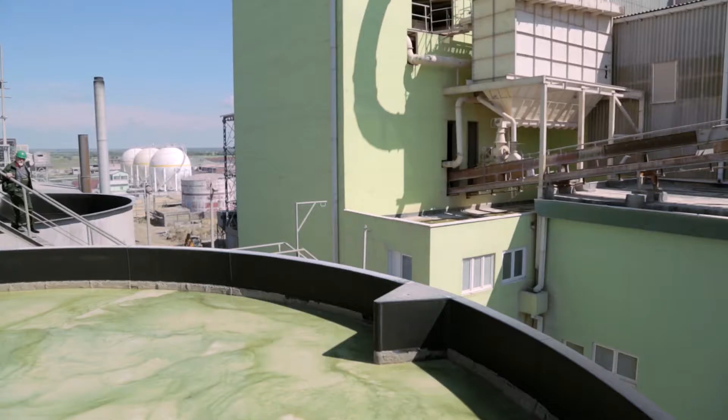The Elixir Group business system is based on a vision of advanced and profitable agriculture. With its 6 member companies and 1,500 employees, the Elixir Group is a regional leader in the chemical industry, in the production of phosphoric acid, complex mineral fertilizers, and other areas of agribusiness.

All the companies making up the Elixir Group system are connected strategically, administratively, and logistically. They are located on the banks of the Danube and Sava rivers, which are regional traffic arteries. The production capacities of the Elixir Group's chemical division are technically integrated: phosphoric acid, refinement of phosphoric acid, mineral NPK fertilizers, and aluminium trifluoride.

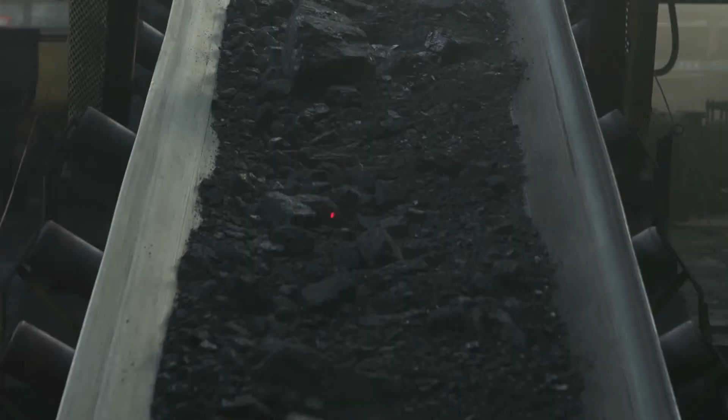At present, production processes in the chemical division use fossil fuels, which account for between 5 and 12% of the cost price of finished products.

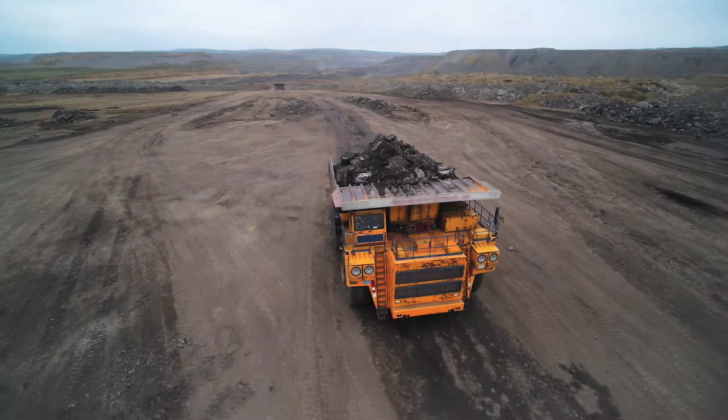The group's most important strategic goals are aimed at increasing energy efficiency in the chemical division and completely replacing fossil fuels with alternative energy from renewable sources. In order to achieve these goals, in line with the corporate strategy of sustainable development for 2020 to 2025, the Elixir Group is establishing a new subsidiary, Elixir Energy.

The principal function of Elixir Energy is successful synergy with the chemical division by implementing the waste-to-energy concept and the circular economy model.

Waste-to-energy means the production of energy by the incineration of waste or the processing of waste into sources of energy. The integrated approach to waste management includes a collection network developed collaboratively with all operators, generators, and owners of waste in Serbia, temporary storage and physical treatment of waste in eco-lager facilities, reuse of recyclable chemicals in the chemical industry, and plants for the recycling of waste as an energy source.

In the Šabac industrial zone, adjacent to the Elixir Zorka complex, is an eco-lager consisting of several installations: multi-purpose covered warehouses for hazardous waste, a reservoir station for waste oils, emulsions, and oily water, open warehouses for non-hazardous waste, mechanical treatment of non-hazardous waste, and preparation of hazardous packaging waste for storage and transport.

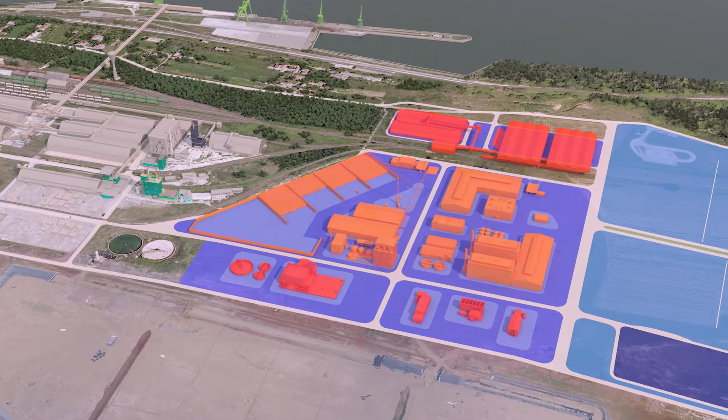The most important features of Elixir Energy are the planned waste-to-energy plants for pyrolysis and incineration of waste. Both plants are fully automated, with integrated systems for safe operation and state-of-the-art measures for environmental protection, in line with the latest BAT demands and EU emission limits.

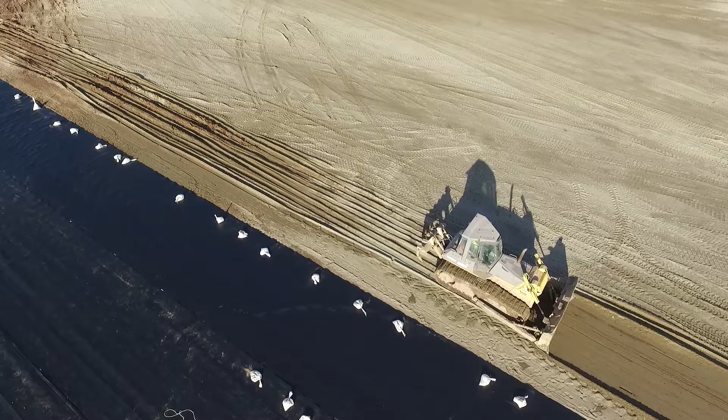Plant residues will be disposed of as non-hazardous waste or stabilized inert solids within the planned ecological island. The waste tire pyrolysis plant uses a thermochemical process to recycle and decompose organic matter. This produces liquid and solid fuels, pyrolysis oil, gas, and coke. The plant also recovers about 10% of metal wire, which is traded as a secondary raw material.

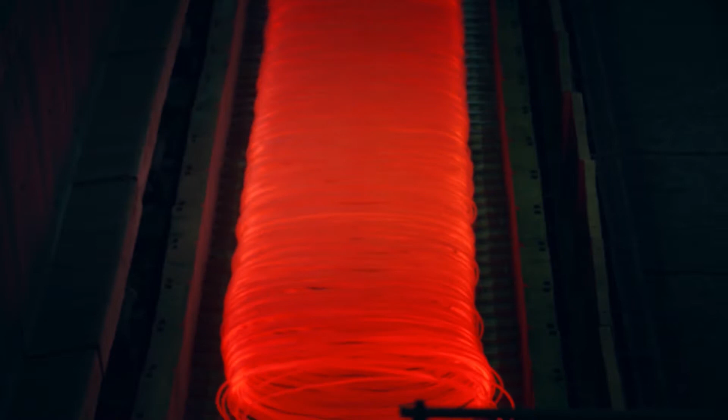The planned capacity of the plant is 30,000 tons of waste tires annually, with the option of including up to 20% of plastic waste. The products obtained from pyrolysis are intended for on-site energy use: 10,000 tons of refined pyrolysis oil, 10,000 tons of coke, and 6 tons per hour of steam.

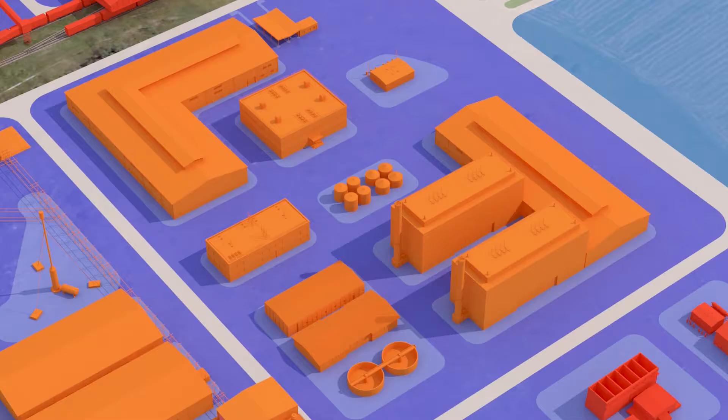Incineration, the heat treatment of industrial and non-recyclable waste, is aimed at using thermal energy and steam for the needs of chemical production processes. It's expected that 35 tons per hour of steam will be produced in the first phase.

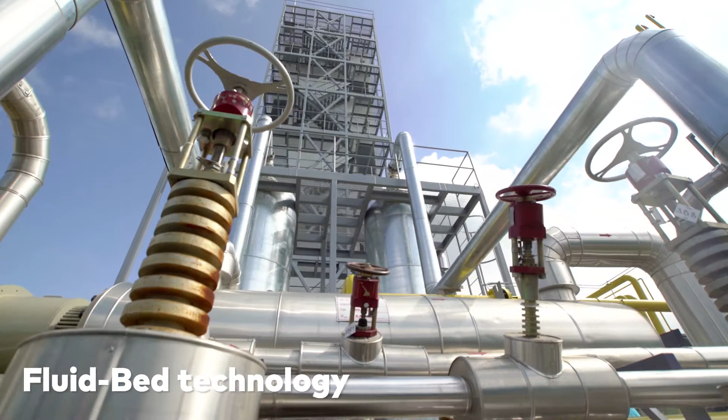Stationary fluid bed technology has been selected as the most appropriate for the kind of waste predominantly generated in Serbia. This technology is versatile, enabling a wide range of solid, paste and liquid waste to be incinerated.

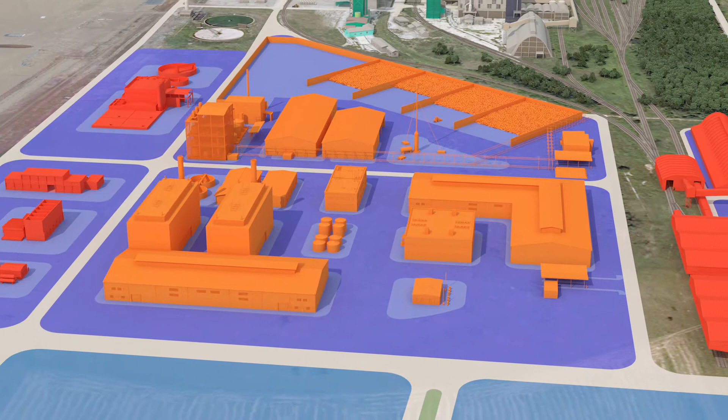The incineration block has a capacity of between 30,000 and 80,000 tonnes of waste per year, depending on the calorific value of the input. 2 incineration blocks will be constructed in phases with a total capacity of 2 by 28 megawatts, in parallel with the development of the industrial chemical park.

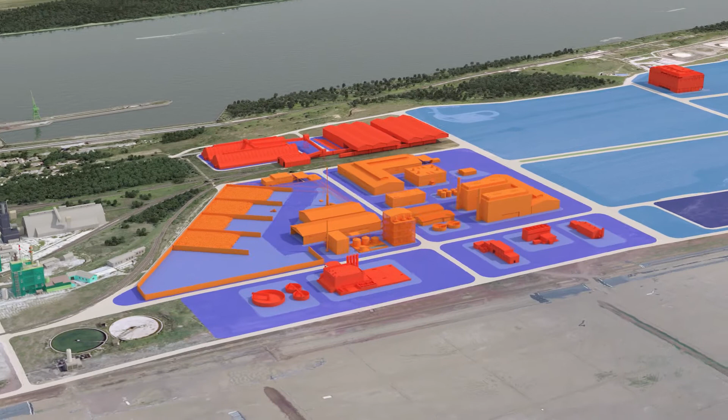In the first phase, up to 2022, the pyrolysis and incineration plants will enable the replacement of fossil fuels with energy from renewable sources, meeting the needs of the group's chemical division to a level of 100% in production of NPK fertilizers and aluminium trifluoride and 65% in production of phosphoric acid.

The synergy of Elixir Energy and the chemical division of the group will contribute to achieving an equally important strategic goal: the active involvement of production units Elixir Prahovo and Elixir Zorka in the circular economy. This is in line with a 2019 EU regulation which urges the use of alternative raw materials and the reuse of waste materials from production and supply cycles in the production of mineral fertilizers and soil improvers.

This lays down realistic conditions for part of the industrial and non-recyclable waste from Serbia and neighbouring countries to be treated in line with the 5R postulates of the waste management hierarchy. In this way, Elixir Energy contributes fully to meeting the overall goals of sustainable development.

The Elixir Energy business model also conforms to umbrella national and European documents, including the National Waste Management Strategy for 2020 to 2025, European directives and goals concerning waste management, amendments to the Basel Convention which oblige every state to deal with waste generated on its own territory, and development of economic collaboration within the mini-Schengen zone.